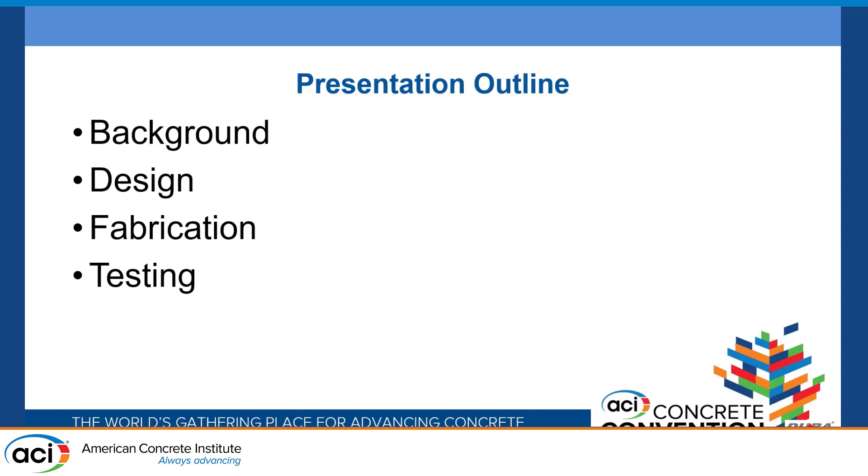This project was part of the main project sponsored by PCI. It's a study on the implementation of UHPC structural elements for bridges and buildings, and the PI is eConstruct USA. So those are all the contributors to this project.

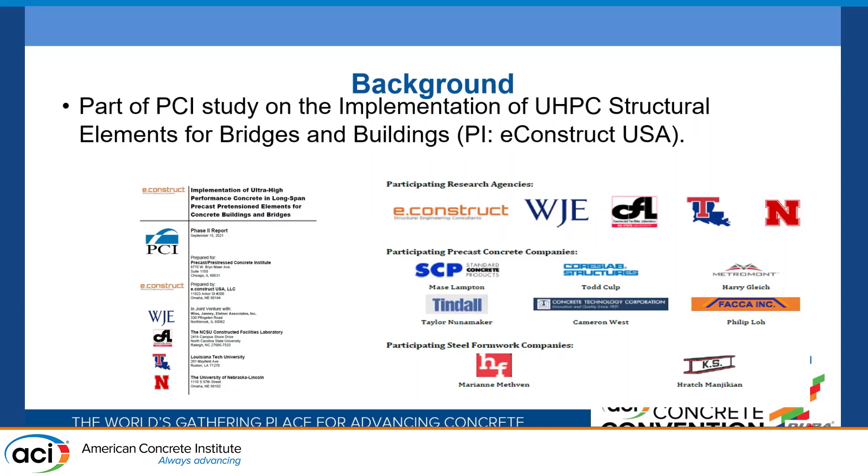So why do we use UHPC? This is just a comparison of the environmental impact numbers, like when we compare precast box beam - that's going to be later on.

I will share that project. For the overall project, the mass of the box beam versus UHPC comes out to be around 45% less mass, because you use less material and it's a slender material section and goes a longer span.

And then the embodied energy has savings of about 15%, which translates to carbon dioxide emission reduction of about 7%, and global warming potential, your greenhouse gas emission, is about 5% reduction. So environmentally there's some impact going from a normal concrete box girder to UHPC beams.

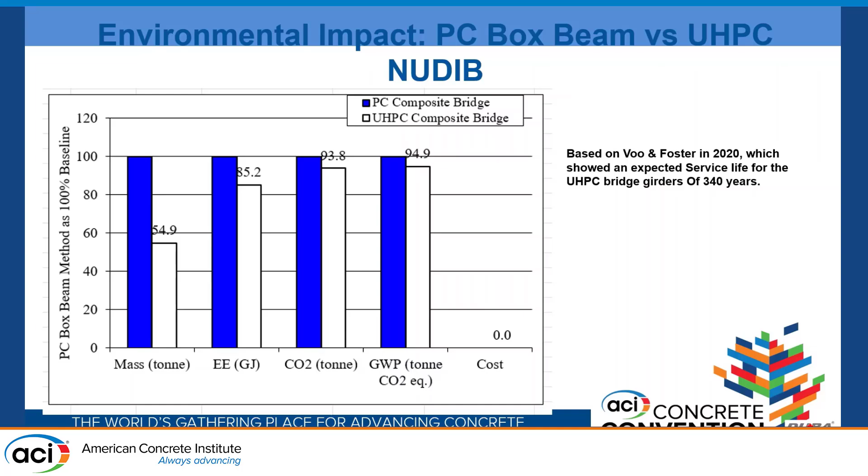So UHPC Decked I Beam development - the cross section was actually jointly developed by eConstruct and ourselves, and it's basically to promote accelerated bridge construction using the least number of precast pieces, minimizing cast-in-place usage.

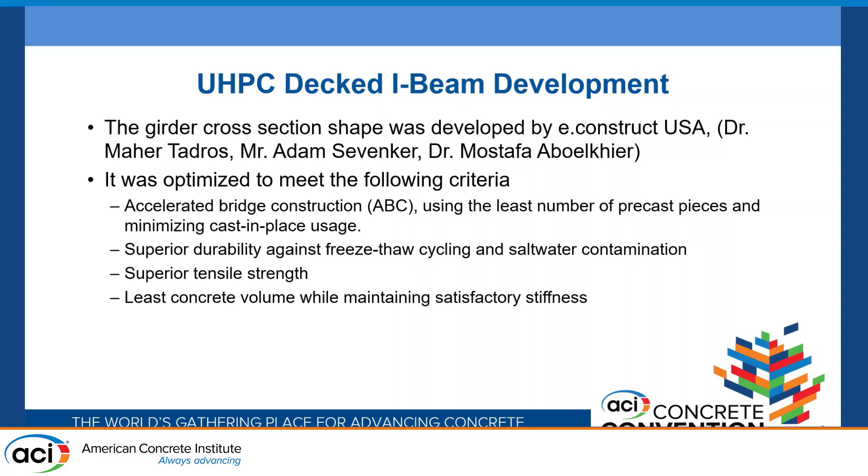UHPC has superior durability properties for freeze-thaw and saltwater contamination. It's suitable for the Canadian climate, and I'm sure also for the U.S. It has superior tensile strength and requires the least concrete volume.

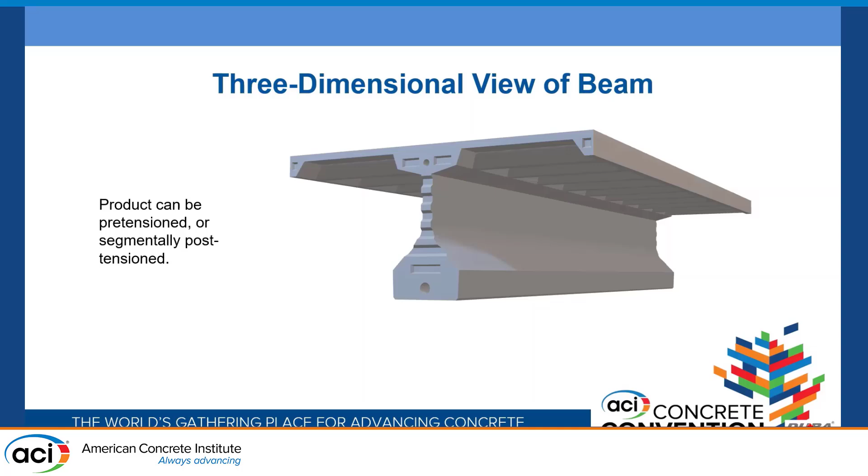So here is the 3-dimensional view of one of the beams. In this case we are showing the post-tension segmental section, but the product can be pre-tensioned as well. There are some dimensions here.

Basically the top flange, in order to save some material, we make it like a waffle. You can see the section, there are some ribs. The ribs go in one direction only, so it's like a T-beam, if you want to simplify it.

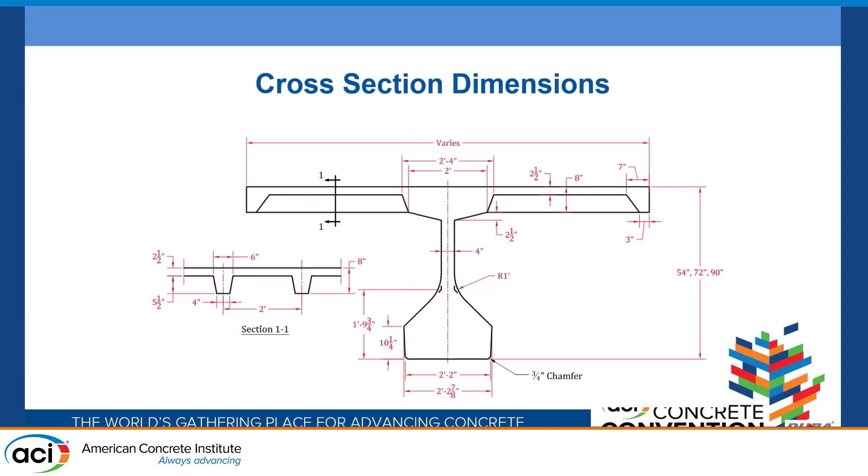Now what are the challenges here? Because you have to cast it all together in one go, the formwork is more complicated, and then you need to deal with the crown, the bridge crown, or even super elevations. So the flange-to-flange connection requires the flange edges to be totally aligned, possibly using a clamping mechanism.

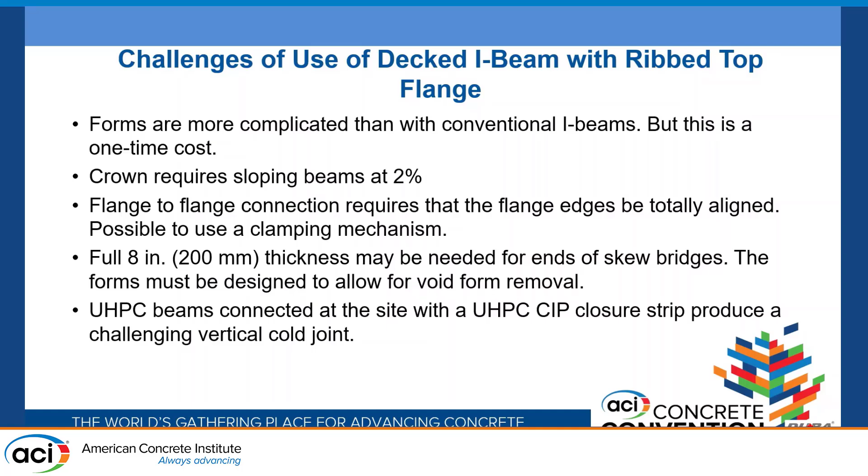And also, because the ribs are further apart, we have to use some high strength steel like ChromX in our design. And then in between the UHPC beams, they are connected by a UHPC cast-in-place closure strip.

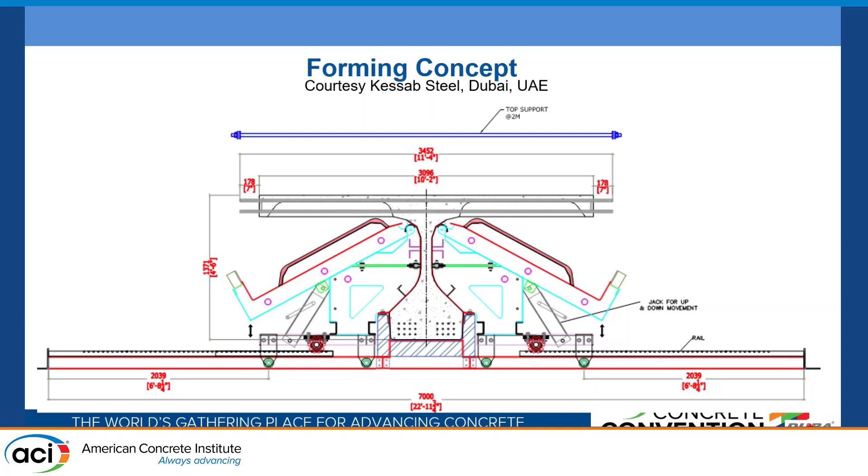So this is one of the forming concepts - quite complicated. We cast one girder as part of the PCI project. It's a 15-meter-long girder with a 1-meter section, cast in our yard, and we had that tested at North Carolina State University.

So there are some pictures here of the girder form of the prestressed girders.

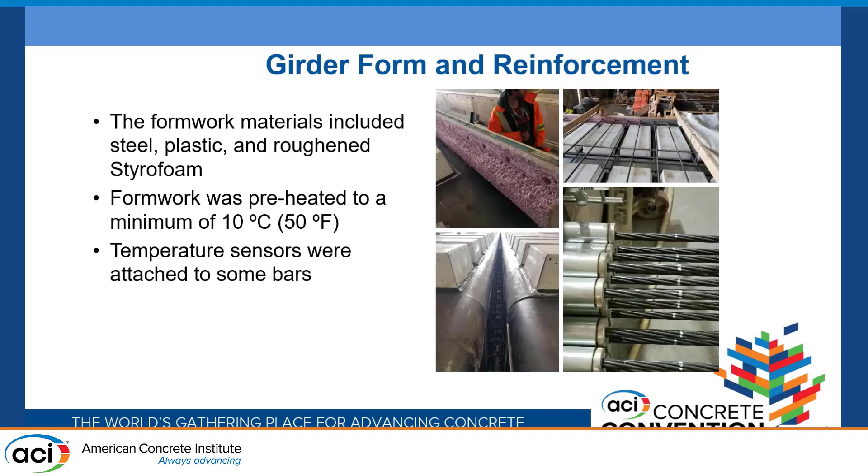UHPC batching - we don't have a mixer that can cast the beams all together for the 15 meters, so we use 3 smaller mixers. One of them is a Skako, which is 0.4 cubic meter or around half a cubic yard, and 2 pan mixers.

It's a very intensive casting process for almost a full 8-hour day, continuously running the 3 mixers. The longest time between castings is about 25 minutes, because we need to wait for the 3 mixers to finish dumping the concrete into the bucket and then cast and discharge them. So ice was used, and also workability admixtures.

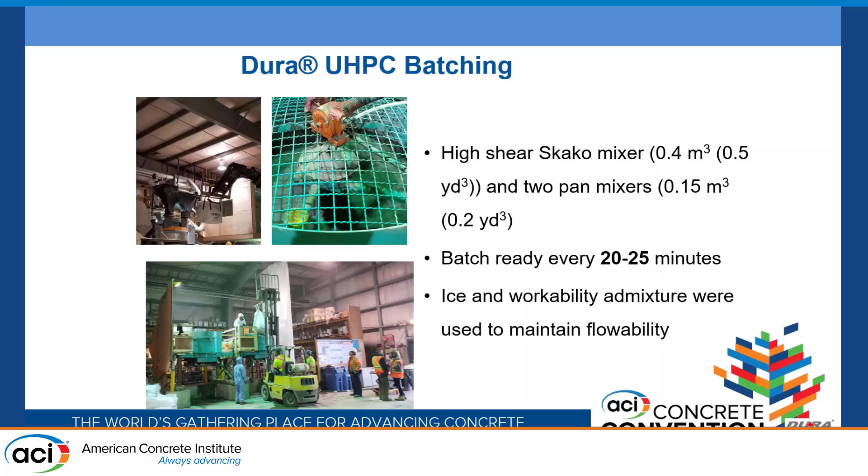So the batching sequence: basically we did all the premix, all the dry powder first, and then add fibers. You can see in the pictures there, like we add some ice.

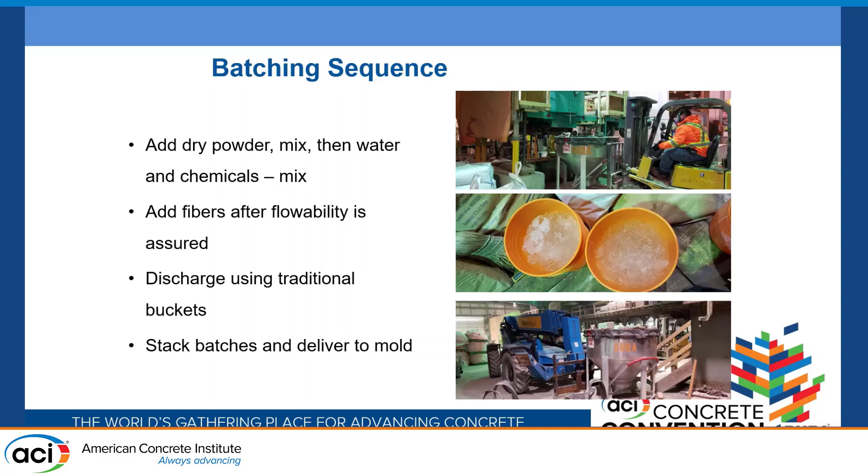Girder placement - we build a special chute so that we just cast the lower bell, the lower flange, the bottom flange, and the web at the same time, from one end to the other, and then come back and cast the top flange.

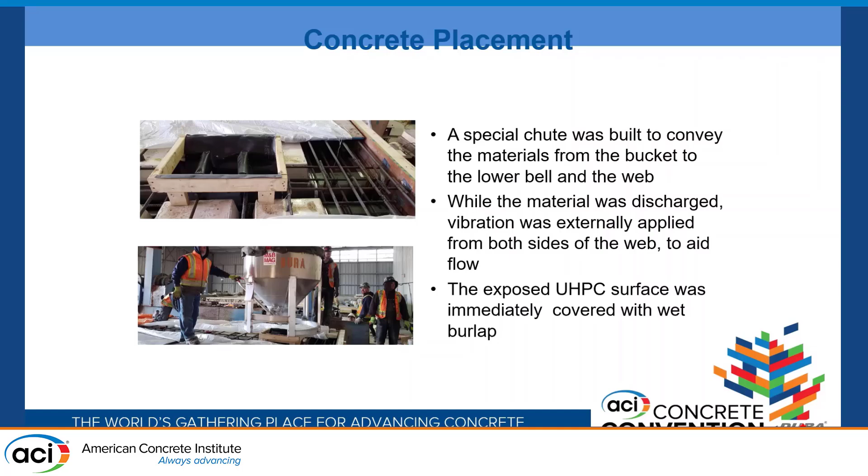So after the concrete filled the web and the bottom flange, pouring of the deck started. But because when we cast the bottom flange and web from one end to the other, and then come back to cast the top flange, the first batch of concrete that was cast was about an hour old. So then we need to use some kind of vibrator to agitate, to ensure that we have a good bond. But we did add some dowels to ensure that we're not losing that interface shear.

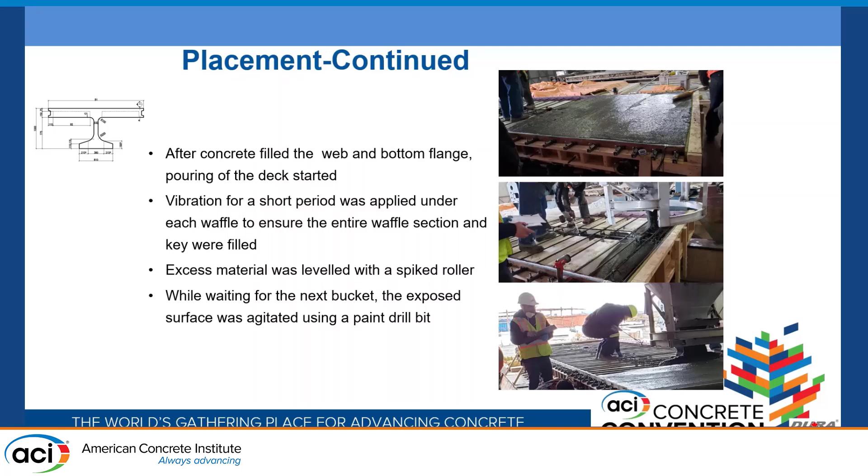So the deck finish, we use some rubber matting to make that rough looking surface.

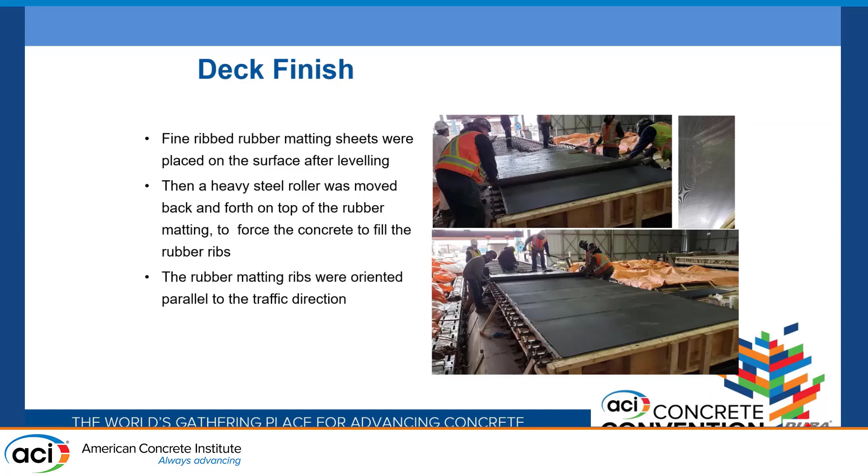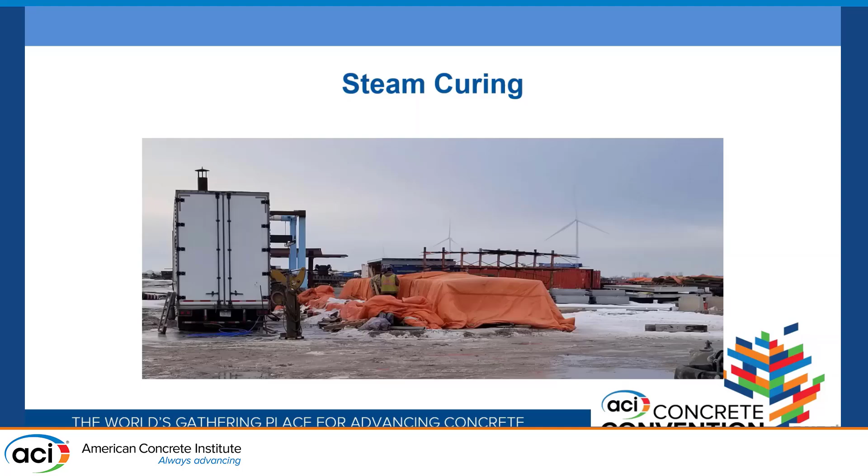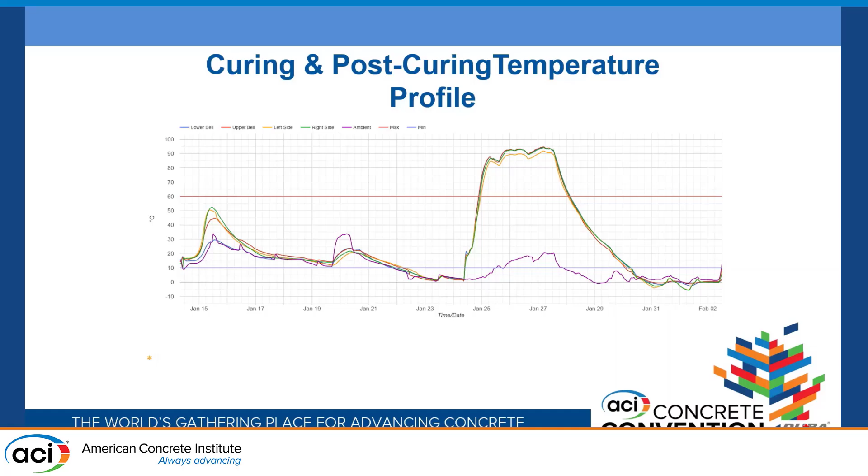Quality control - we need the cylinders for all kinds of testing. We need to send to North Carolina State University so they can test it together with the beam. We need to send to WJE, the materials consultant for the PCI project. We need to do some ourselves. So that's a lot, and then Corina's folks help us with testing in Ontario.

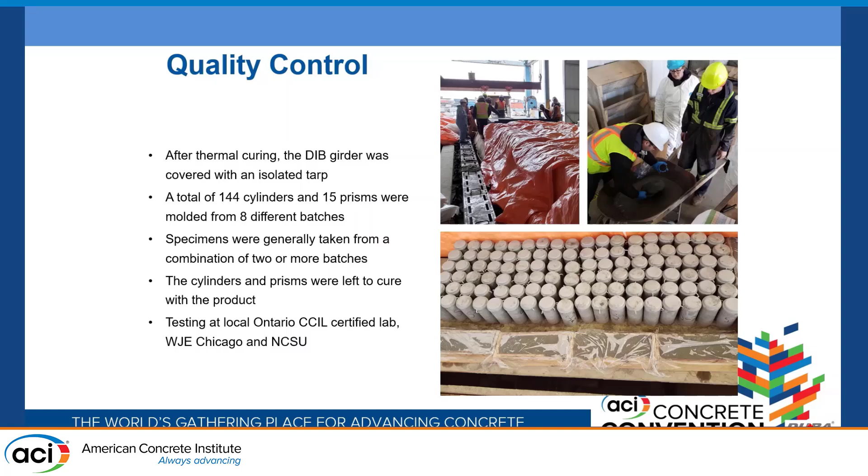So testing at North Carolina State University - the girder was shipped on February 21, 2020. If you remember, that's just at the beginning of the COVID. By the time it got to North Carolina State University, the university was in lockdown, so it was a big problem to get in to test the girder.

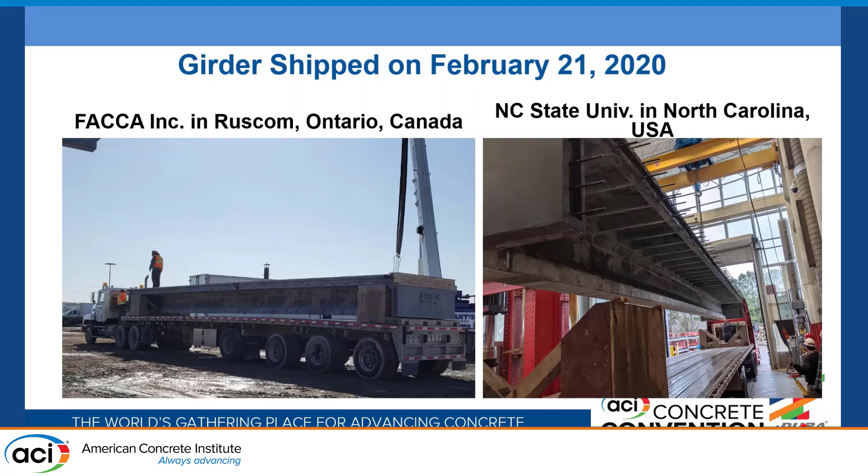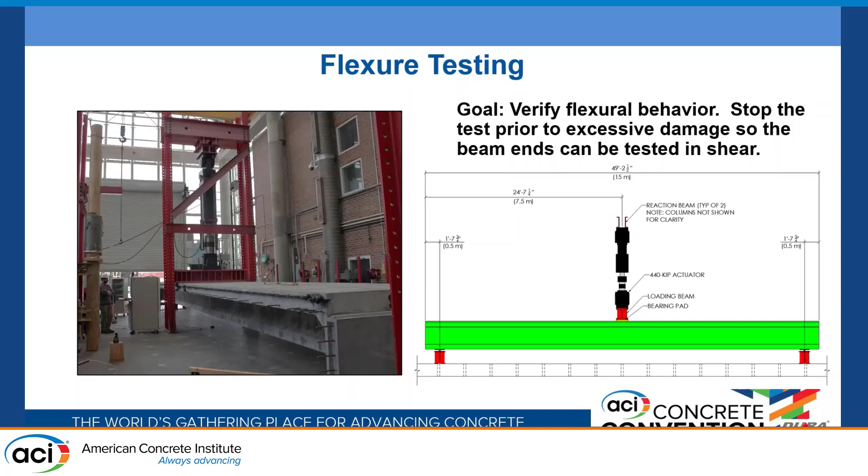Anyway, they did manage to test them - flexural testing, basically testing the girder right at the midpoint. But we did not try to damage the girder; we just ensured it met the load requirement, because we only have one girder. So the flexural testing was stopped at some point to make sure it meets the design load.

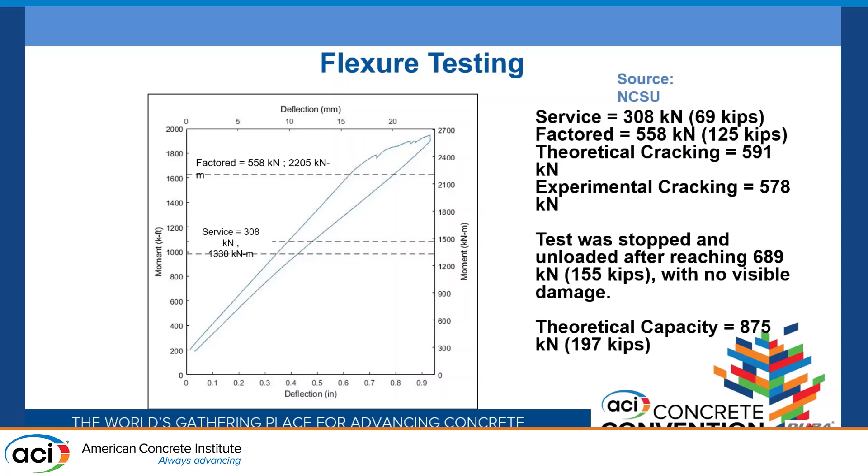Now for shear testing, what we have here is that because we only have one girder, half of it we don't have any stirrups, and the other half we have stirrups. That's by design - we made it that way so that we could show that UHPC beam actually doesn't need stirrups. That was the aim.

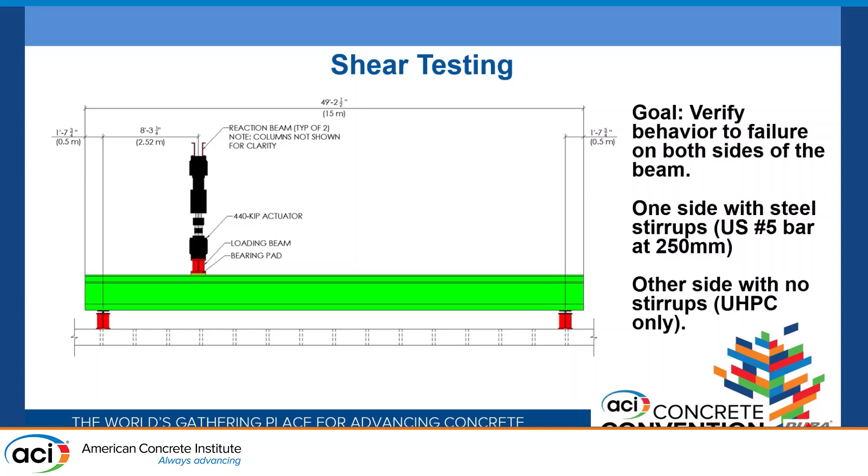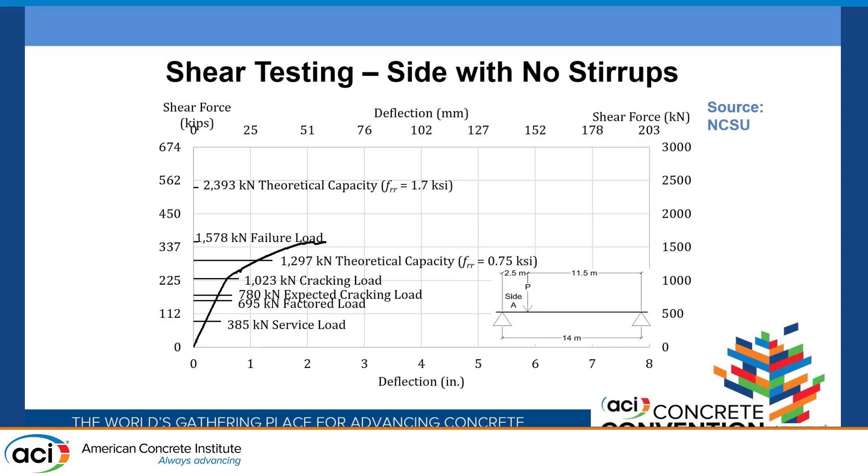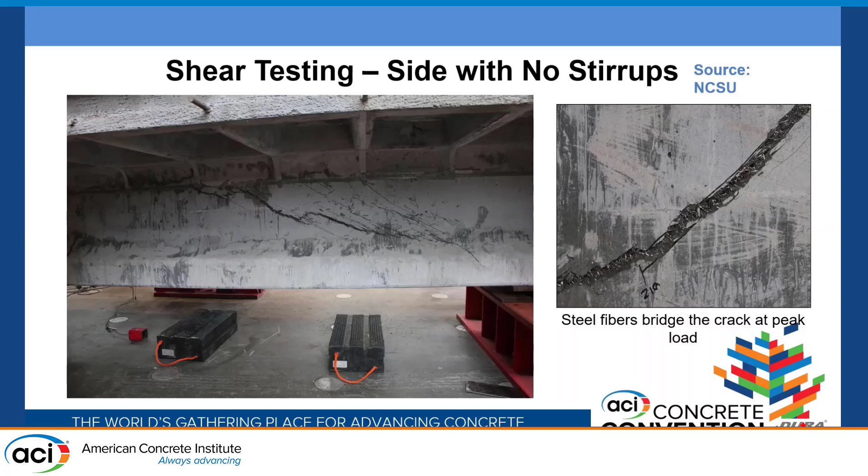So then the shear testing - this is the side with no stirrup. You can see that the service load is way below there, and the factored load, and basically the failure load is about 2.5 times the design load. You can see this is the shear failure, and then there's the steel fiber bridging the cracks, and there's a video here.

How do I do the video?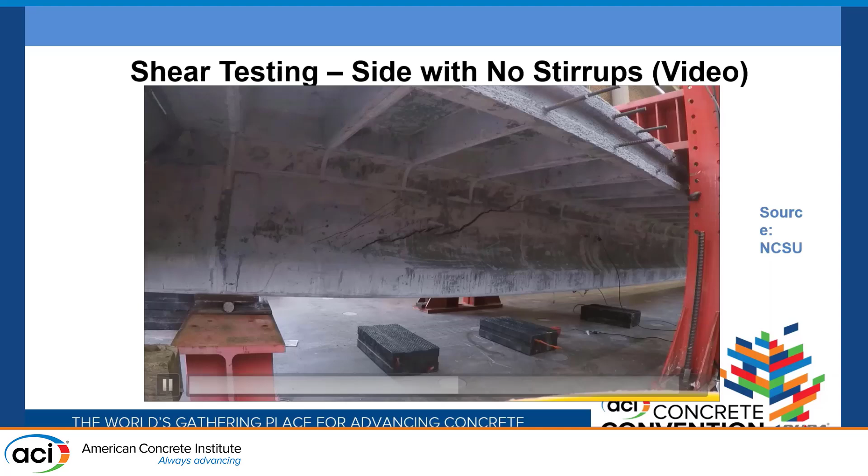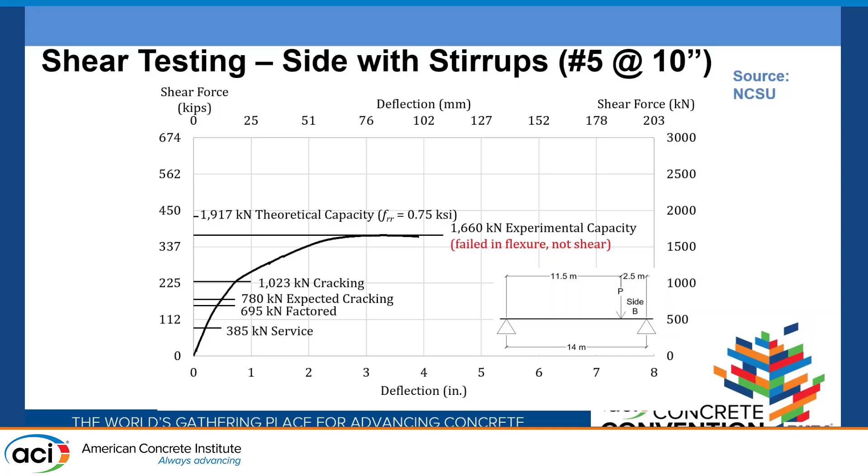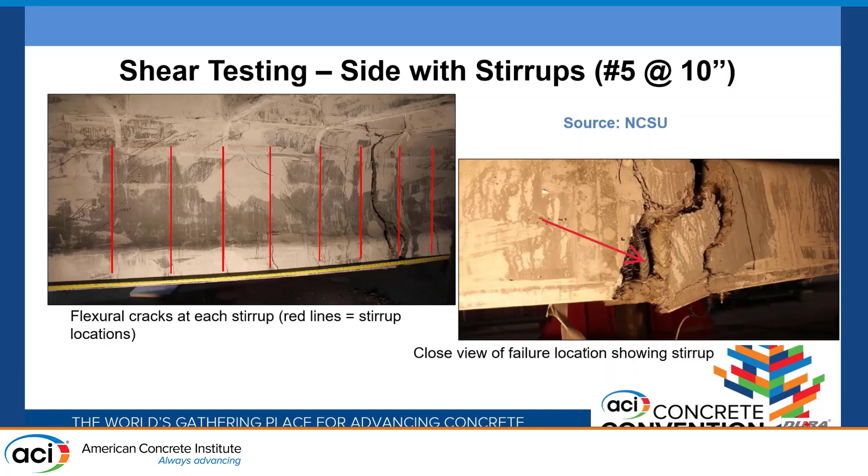Okay, then we test the side with the stirrups. We didn't get a shear failure - it failed in flexure because of the stirrup. You can see from here the cracks actually line up with where he marked the stirrups in red, and you can see the stirrups on the right hand side there. There's a video here. So with the stirrup, you can see the failure is different - it's not a shear failure.

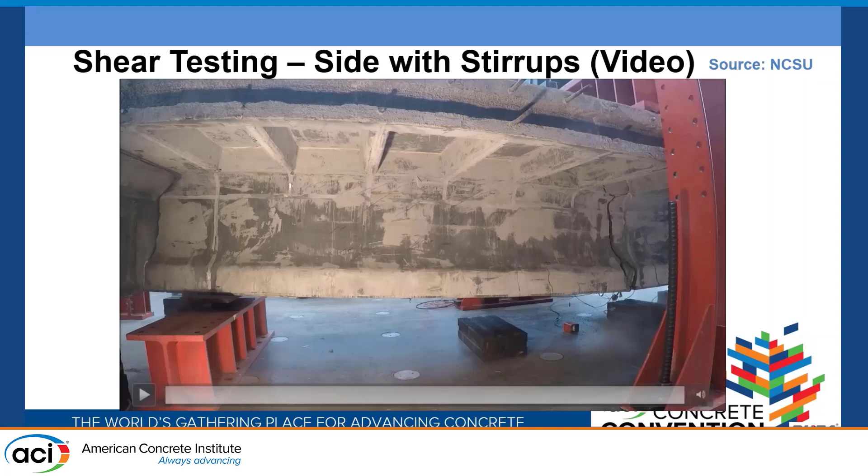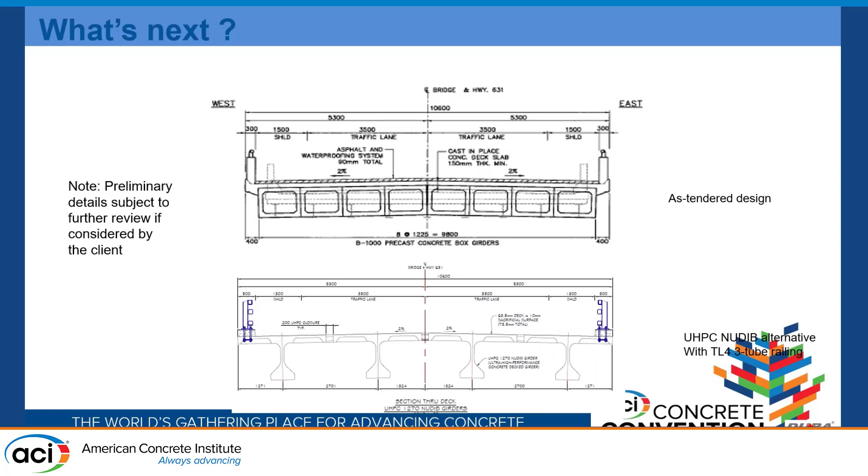So we do have semi-integral diaphragms, and we tested that. I'm not going to go too much into this - University of Nebraska, they were testing quite a bit of that too. And there's a potential new project in Ontario, which we are pursuing with WSP folks, to replace box beams side by side with UHPC girders.

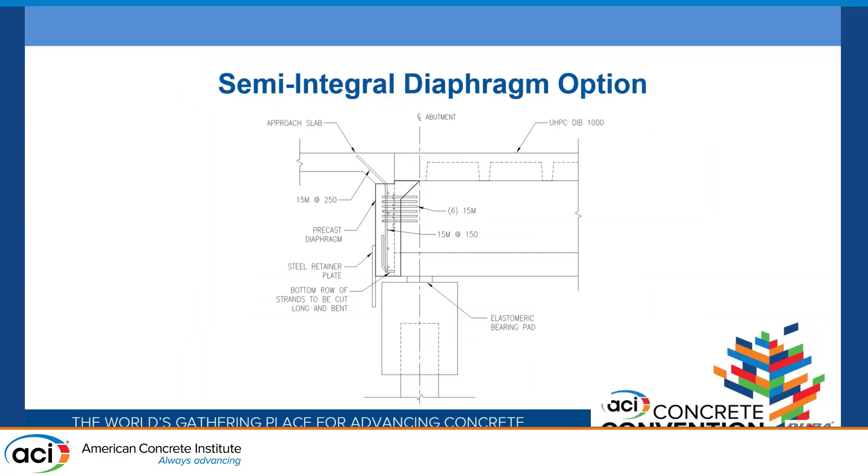Here's some integral abutment details, and a semi-integral diaphragm option that we can do too.

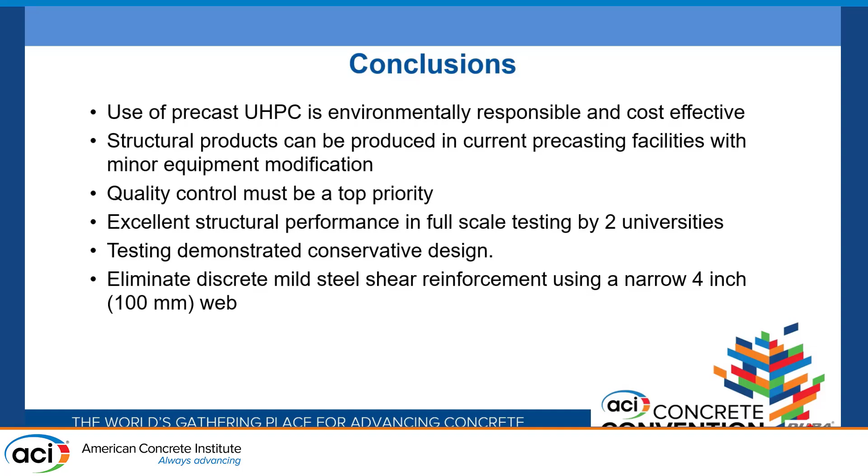Conclusions: use of precast UHPC is environmentally responsible and cost-effective. Structural products can be produced in current precasting facilities with minor equipment modification. Quality control must be a top priority. Excellent structural performance in full-scale testing by 2 universities. Testing demonstrated conservative design - we try to improve on that, optimize it. Eliminate discrete mild steel shear reinforcement using a narrow 4-inch web. Thank you.